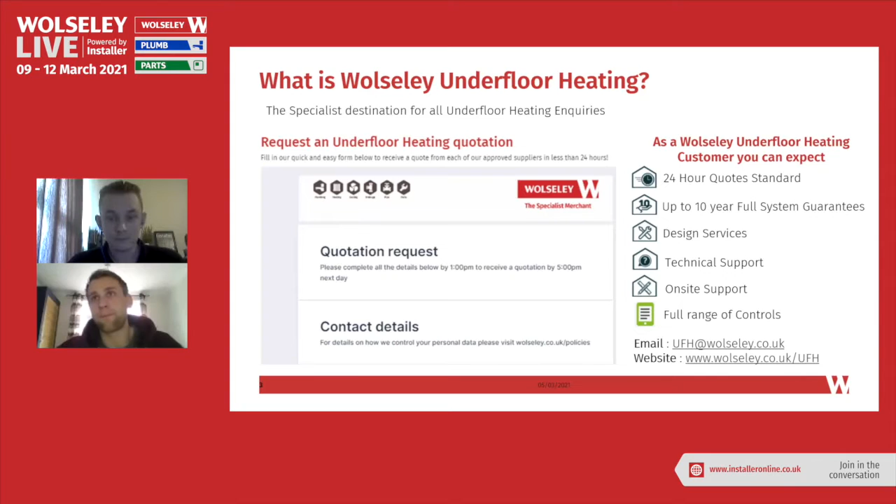Hello and welcome to Underfloor Heating Explained, part of the Wolseley Installer Live event. In today's session, we're going to talk through a brief underfloor heating market overview, reasons why you would install an underfloor heating system, how underfloor heating works, what are the key components you need to install an underfloor heating system, heating controls, suitable floor finishes, screeded floor solutions, timber floor solutions, single room packs and where to use them, and further information on the next steps for your project.

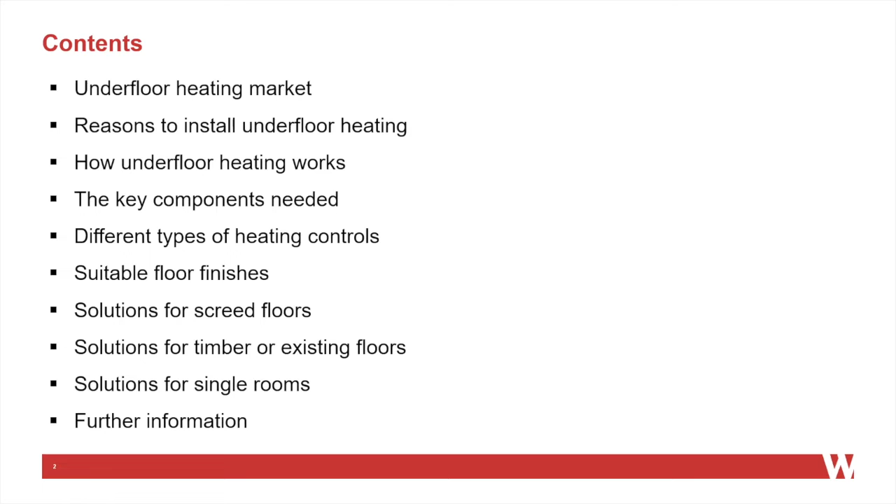The UK underfloor heating market continues to be one of the fastest growing sectors of the UK heating industry, accounting for approximately 8% share by value in 2019. The underfloor heating market has an estimated value of around 171 million, representing a steady growth of 3% compared to the previous year. This market is broadly classified into two product types: water-based underfloor heating systems and electric underfloor heating systems. With the implementation of future home standards, market prospects for underfloor heating systems in the UK remain positive.

Water-based systems are particularly compatible with low-carbon home heating solutions such as heat pumps. The performance of the UK underfloor heating market in the last 5 years has been positive, reflecting buoyant activity with some sectors of the non-residential construction industry and relative stability in the residential house building and renovation. The increasing focus on energy efficiency and the environment has supported demand for underfloor heating systems. It is estimated that water-based underfloor heating is around 25% more efficient than radiators when used with a condensing boiler, and up to 40% more efficient when running from a heat pump.

Greater uptake of heat pumps in the renewables sector is also thought to have contributed towards growth in the market, and they will have an increasingly significant role in meeting the 2050 carbon net zero target. In 2019, the domestic underfloor heating sector was worth an estimated 113 million, or around 66% of the overall market value. This includes activity by house builders, the self-build market, and refurbishment projects in residential homes. The water-based underfloor heating sector was worth an estimated 111 million, with electric underfloor heating systems accounting for around 60 million.

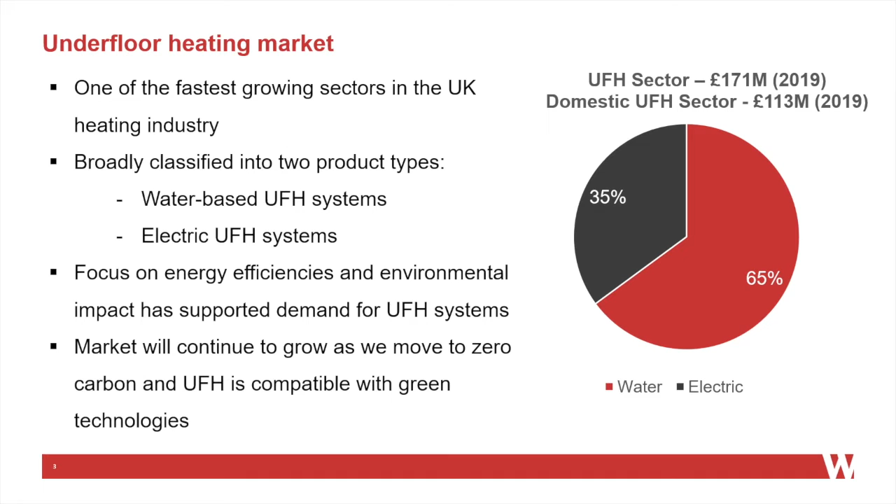Many people think of underfloor heating as a posh form of heating. In reality, it's a more human form of heating, working with the physiology of the human body. We are predators, and all of our senses, smell, taste and hearing, are on our head and cannot be covered if we are to survive. Even in extreme cold, we can have our face uncovered. Warm feet and a cool head is the way that nature designed us.

Underfloor heating, unlike radiators that work with high temperature boilers but won't work well with low temperature air source heat pumps or ground source heat pumps, underfloor heating will work well with high and low temperature heat units.

Underfloor heating systems have much more sophisticated control methodology. Using programmable thermostats in every room is the ability to turn the boiler on and off for every room in the house, unlike radiator systems that rely on one central thermostat that turns on every room in the home.

Underfloor heating is compatible with conventional and renewable heat sources that reduce environmental impact and cut fuel bills, including air and ground source heat pumps and solar panels. It's designed to work with low water temperatures and can reduce energy consumption and heating costs by up to 20%.

Underfloor heating also creates more living space. By removing bulky and unsightly radiators, it will free up wall space and give freedom for interior design. It creates a healthy living space with less moisture and lower air movement and may help reduce dust allergens. Plus, with no hot radiators and sharp edges, it creates a safer space.

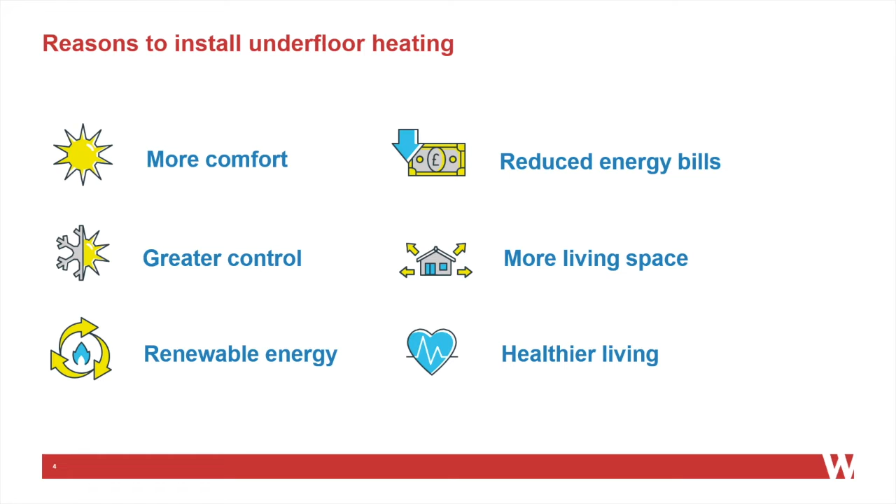Think of a bonfire. You can stand in front of a bonfire and the radiated heat will be felt on your face and body. However, your feet and back can be freezing cold. This is an extreme example of radiator heating. Underfloor heating, however, warms your feet, and radiated heat warms your body from every angle.

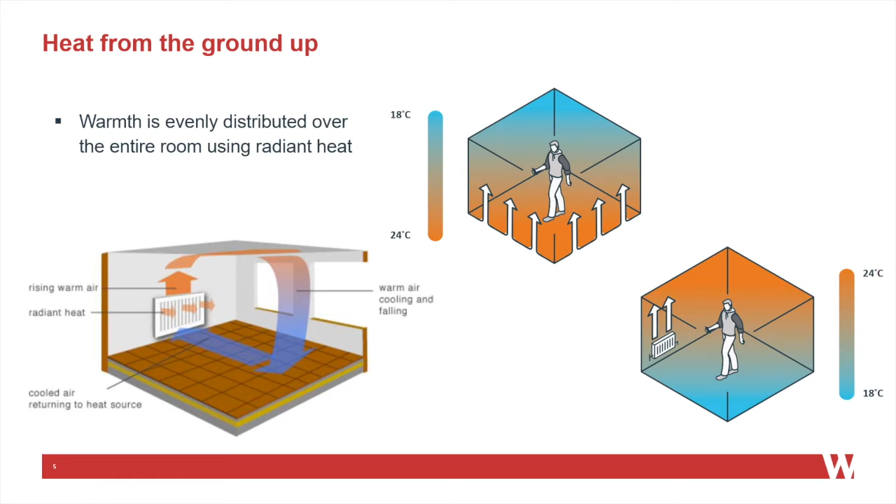How does underfloor heating work? Intelligent room thermostats activate the correct zone to heat on the manifold. The control pack pumps warm water through the circuit of pipes beneath the finished floor. Once the desired temperature is reached, the zone will switch off. If the air temperature in the room drops, the thermostat will reactivate the heating process.

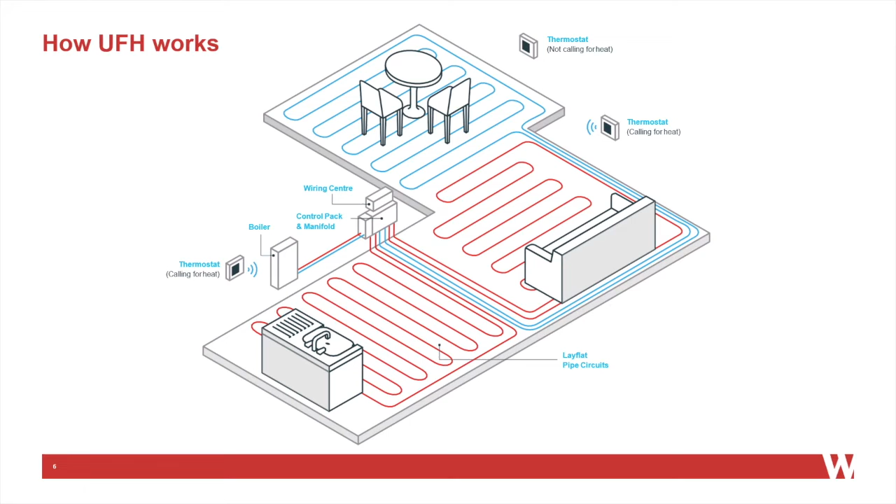Key components to an underfloor heating system. When buying a car, there is a huge choice of different types available. Each model will have benefits and drawbacks, mixing the purchase cost, power, fuel economy, gearbox type, technology and number of seats, etc. All these features need to be carefully considered to achieve the best package.

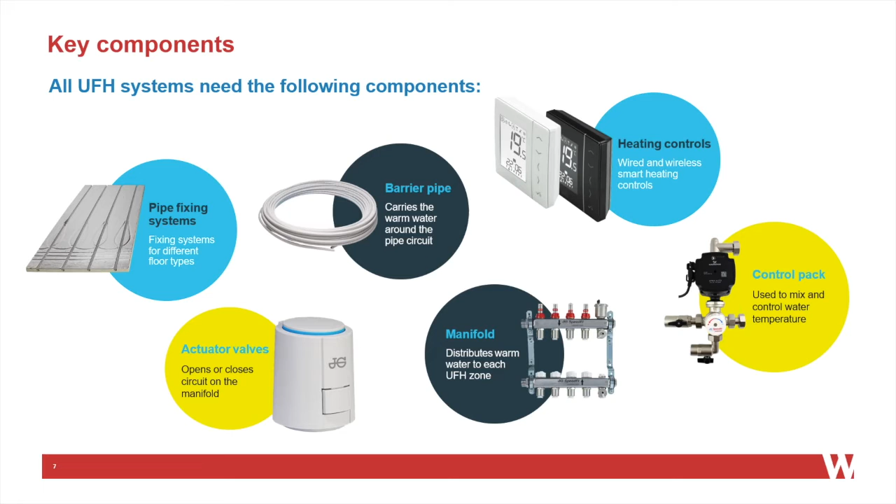Underfloor heating systems are exactly the same. Careful consideration needs to be made when combining the components needed to make an individual system. Considerations such as heat needed for the project, number of rooms to be heated, the heat source, the control type, and the floor construction. In order to achieve the correct mix, a comprehensive basket of components needs to be available to the installer.

Heating controls come in various types: simple to use dial thermostats, digital thermostats, programmable thermostats, 230 volt thermostats that we can connect to the mains, battery thermostats for simple and retrofit solutions, and internet-enabled smart thermostats. All these types have features that appeal to different customers. Some control packages also have the ability to combine the control of underfloor heating, radiators, and hot water systems in one package.

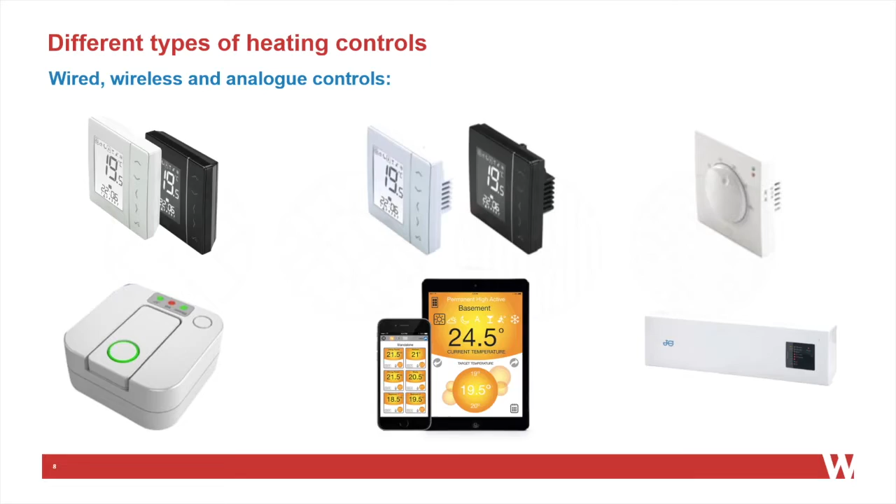Suitable floor finishes for use with underfloor heating systems. Some floor finishes offer better thermal conductivity than others, and therefore can impact system's performance. While underfloor heating can work with any type of floor covering, some such as wood and vinyl need extra consideration to prevent excess temperature. Most ceramic and stone floor finishes have a low thermal resistance. The hard surface quickly and effectively transfers heat, making it an ideal partner for underfloor heating.

Vinyl and linoleum flooring offers low resistance to heat due to its thin layer. Most types of vinyl and linoleum are suitable for use with underfloor heating, but the temperature should not exceed 26 degrees. Due to good heat transfer properties, timber floors work well with underfloor heating, especially engineered timber. Temperatures should not exceed 27 degrees and advice should be sought from your supplier.

Carpets provide the highest heat resistance. Make sure the underlay is suitable for use with underfloor heating and the combined carpet and underlay TOG value is less than 2.5. The higher the combined TOG value, the lower the heat output.

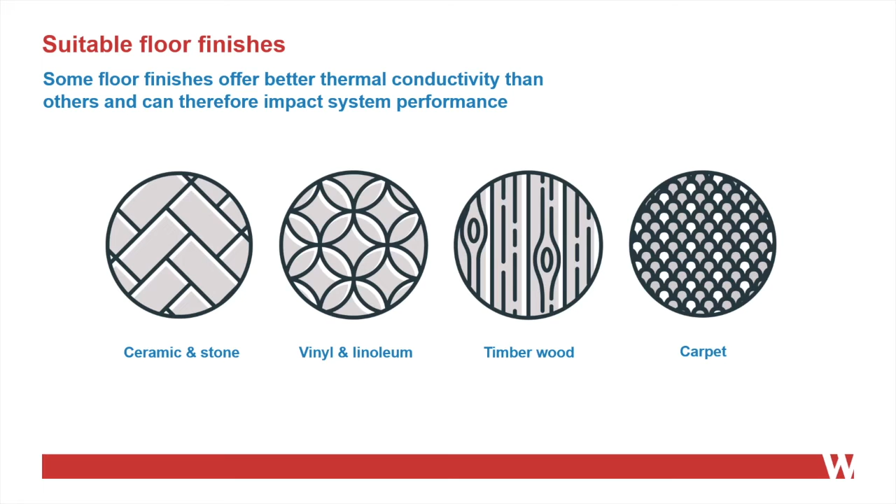Pipe fixing systems for screeded floor solutions.

In the UK, there is an overwhelming variety of construction methods. This applies to floor types as well: concrete and screed, joists and floorboards, block and beam, manufactured joists, floors under construction and existing floors. Some buildings combine different types in one construction. Many of these floor types present different challenges to the underfloor heating installer. Underfloor heating systems have to be able to jigsaw into these different floors in order to present viable solutions.

The vast majority of underfloor heating systems are installed in solid floor systems. Staple, mounting rail and castellated mats are the typical choices for this application.

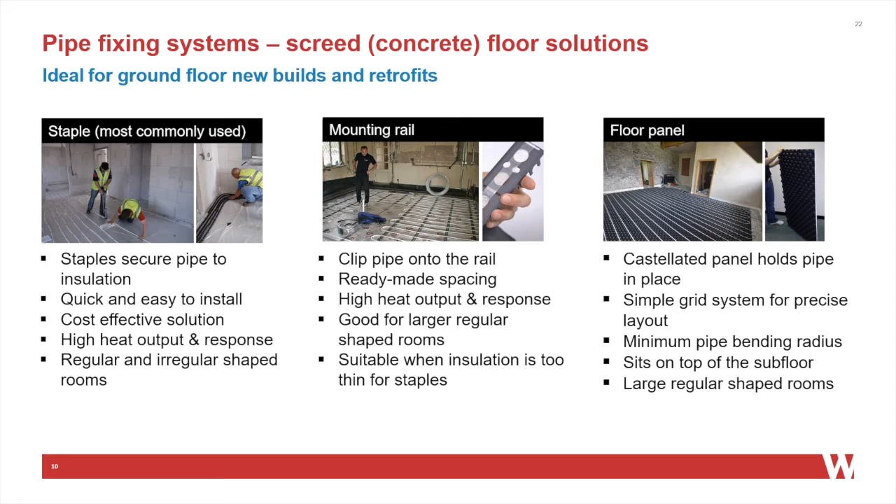Existing floor solutions. Joisted floors present different challenges. Underfloor heating can be installed either underneath the floor or above the floor. Under-floor installation is often chosen as it has no effect on the floor height, but it can be difficult in existing properties. Underfloor heating fitted above existing floors has the advantage of easier installation and in most cases higher performance.

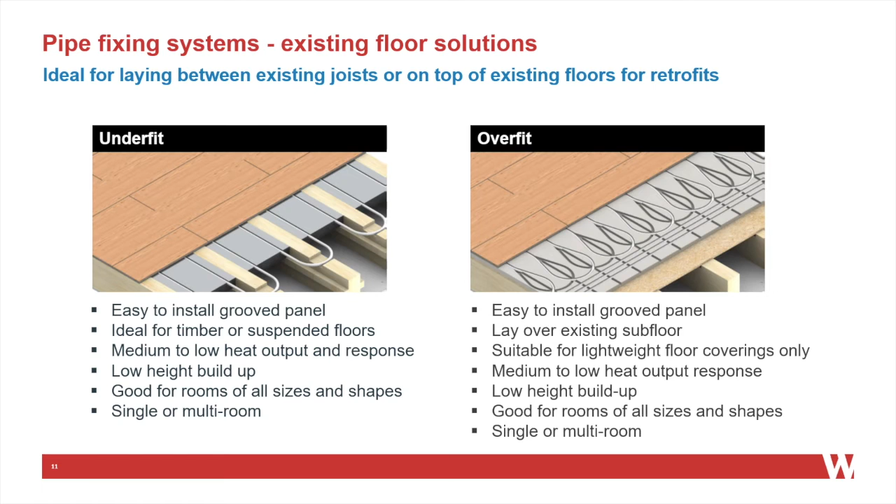Spreader plates from above are used on traditional wooden joists and sit between the top of the joist and the floor covering. Spreader plates from below are typically used for installing into an existing building where you don't want to lift the floor up, or where the building has engineered joists. Spreader plates from below sit within the joist span but don't interfere with the existing floor above.

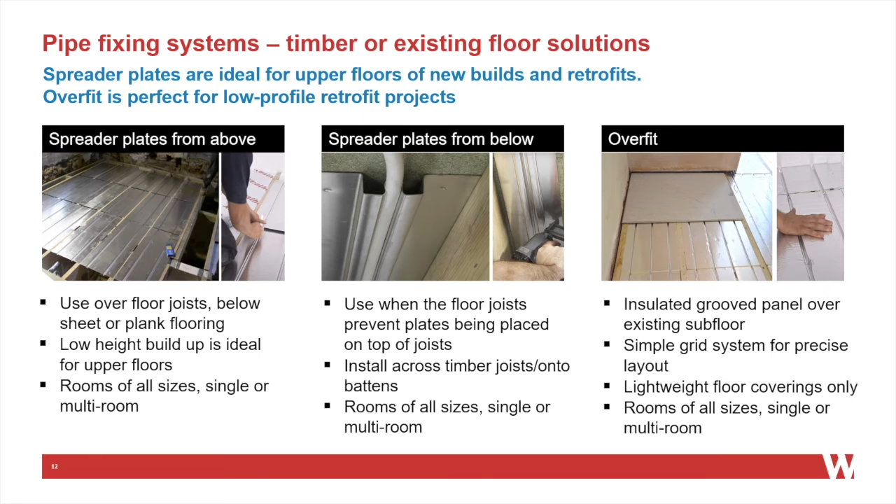Overfit is a typical solution for putting in a sandwich layer over an existing floor where it is not possible to access the floor joist or cut into the floor. Aluminium spreader plates for below-flooring and overfit boards for above-flooring solutions are the usual choice.

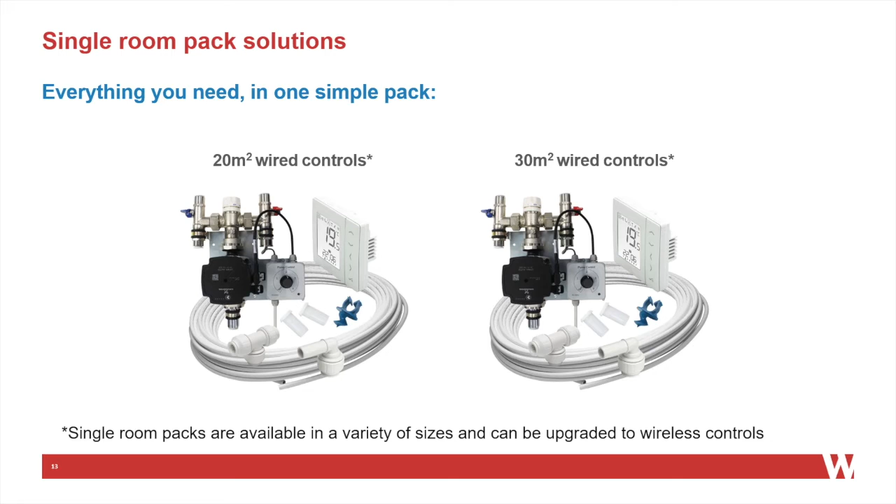Single room packs. These are suitable for single rooms including conservatories, bathrooms, kitchens and extensions up to 30 square metres. There is everything in one simple pack: simple push-to-fit connections and flexible pipe, a ready-to-plug-in pre-assembled control unit and pump, and user-friendly programmable controls, whether standalone or connecting to an existing radiator network.

Once you have decided on using one of the underfloor heating systems we have talked about today, you will see Wolseley provide a 24-hour quotation tool through their website or extensive branch network. A further range of how-to and technical data videos are available.

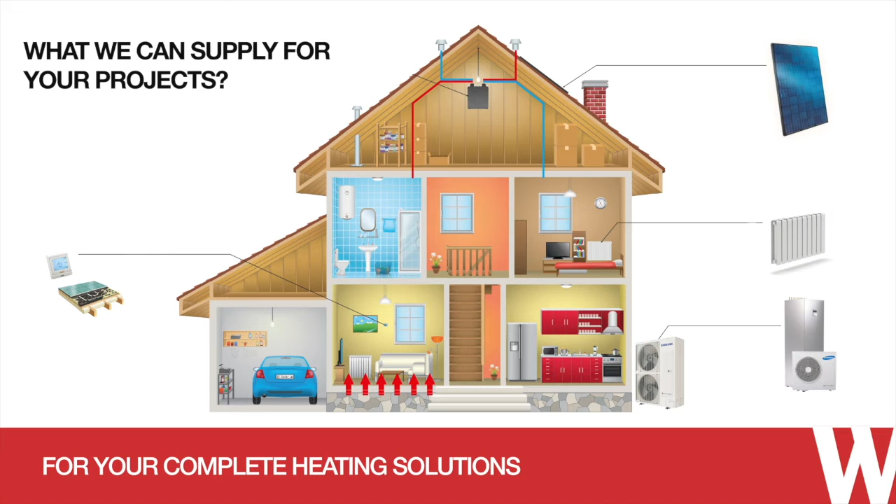Underfloor heating is ideally suited to a renewable heating system, so to accompany this we have a wide range of renewable systems available: underfloor heating, underfloor fixing methods for both ground and upper floor levels, and systems to support all project types and applications.

Air source heat pumps. In conjunction with underfloor heating, air source heat pumps are a renewable energy source that has a low carbon footprint and is cost effective. Aluminium radiators: not only aesthetically pleasing, our designer radiators have a high heat transfer and are ideal for air source heat pump applications.

Solar thermal. A solar thermal heating system generates heat by using solar radiation to heat the hot water in your property. It can work with underfloor heating and air source heat pumps, and is also cost effective.

Why choose renewables? The Future Homes Standard 2025 puts forward a notional building design which sets out areas where improvements are made. Due to the implementation of new Part L and Part F, the minimum carbon reduction required is 30%. It is proposed that the 2025 Future Homes Standard will require a 70 to 80% reduction. This can be achieved by implementing fabric improvements and/or the use of low-carbon technologies, such as heat pumps.

By fitting a heat pump now, it is ensured that the installation is Future Homes ready. Heat pumps operate more efficiently at lower flow temperatures, so underfloor heating is the perfect partner.

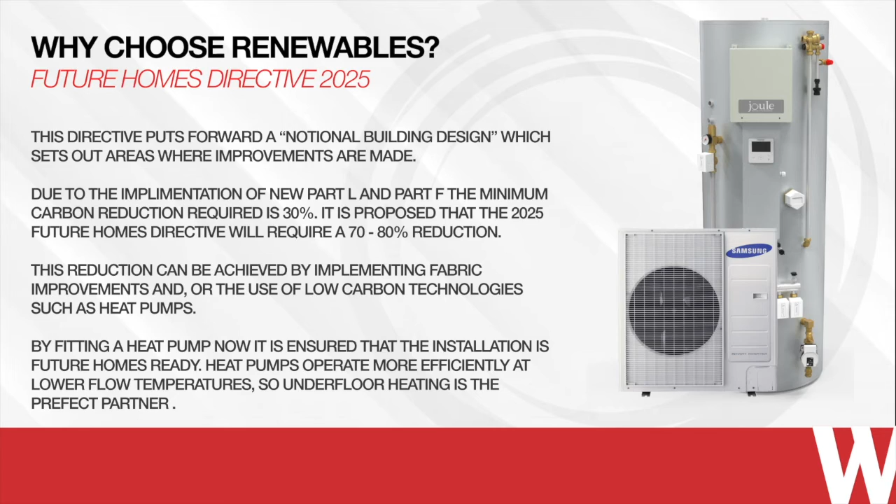How does a heat pump work? An air source heat pump is classed as a renewable heating system as it does not produce any CO2 emissions. It runs off electric, but takes its heat from the outside air and transfers this to your heating and hot water. The system produces low temperature heating, so heat emitters such as radiators and underfloor heating must be sized with this in mind.

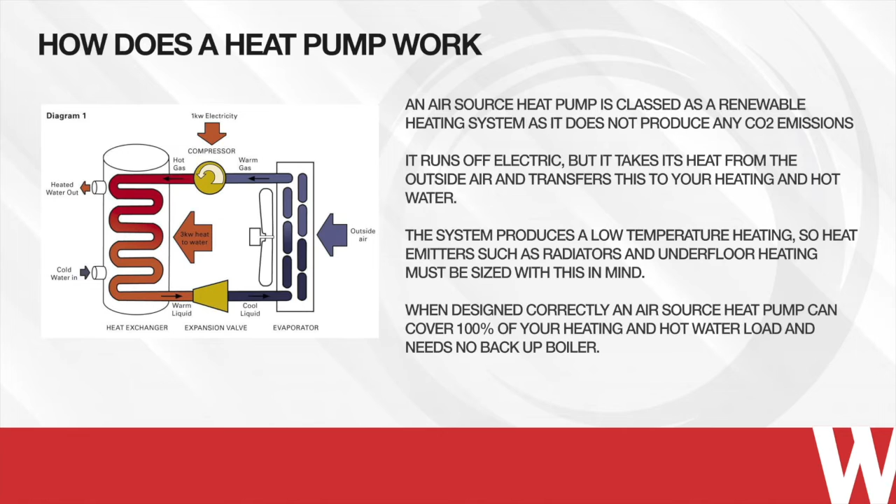When designed correctly, an air source heat pump can cover 100% of your heating and hot water load and needs no backup boiler. Why choose a heat pump? A typical air source heat pump has a COP, or coefficient of performance, of around 3.2.

This means it generates three times more heat than its energy input, making the system over 300% efficient. A seasonal COP, or SCOP, is adjusted to account for varying outdoor temperatures in different seasons. Thanks to an outstanding SCOP, heat pumps are efficient all year round and can still extract heat from the air in very cold external temperatures.

Solar thermal panels are another way of heating your hot water using renewables. These panels use solar radiation created by the sun to generate heat, which is then transferred to your hot water cylinder via an additional coil. Solar thermal panels can be integrated into boiler systems, reducing the load on the existing system, resulting in a reduction of your CO2 emissions and fuel bills. They can also be integrated with an air source heat pump system, increasing its efficiency even more.

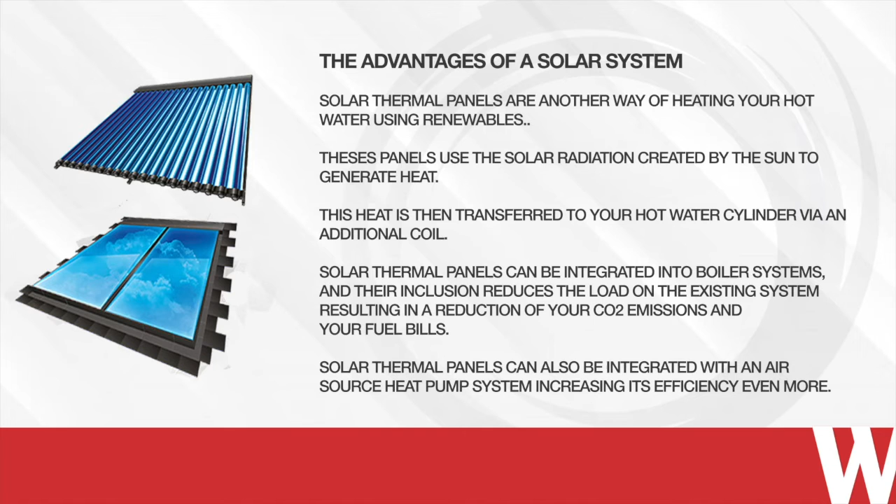The inclusion of radiators can work to boost the effectiveness of an underfloor heating design. A popular choice are aluminium radiators, which offer a stylish alternative to steel. With a high quality, modern powder-coated white finish, these radiators provide a higher heat output at lower flow temperatures and are ideal for air source heat pump systems. They come available in a range of horizontal and vertical sizes. Aluminium radiators can also be used with a renewable air source system, as aluminium radiates heat better at the lower temperatures a heat pump provides, meaning they will produce a higher heat output than standard steel radiators.

The type of hot water cylinder must be considered when choosing your system. A standard indirect cylinder has a coil suitable for a high temperature gas or oil boiler. When using a low temperature heat pump, a high gain cylinder must be used, which has a bigger coil that can better transfer the lower flow temperatures to your domestic hot water.

When using a solar thermal system, a twin coil cylinder is required. These are available in standard indirect and high gain models and have a secondary coil for the heat generated by the thermal panels. Finally, cylinders with integral buffer tanks are also available for use with renewable systems, used to increase the system volume and the efficiency.

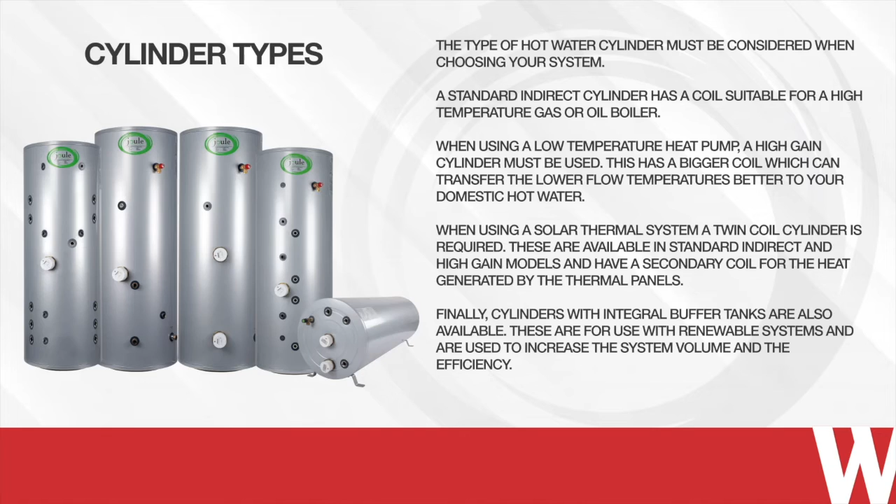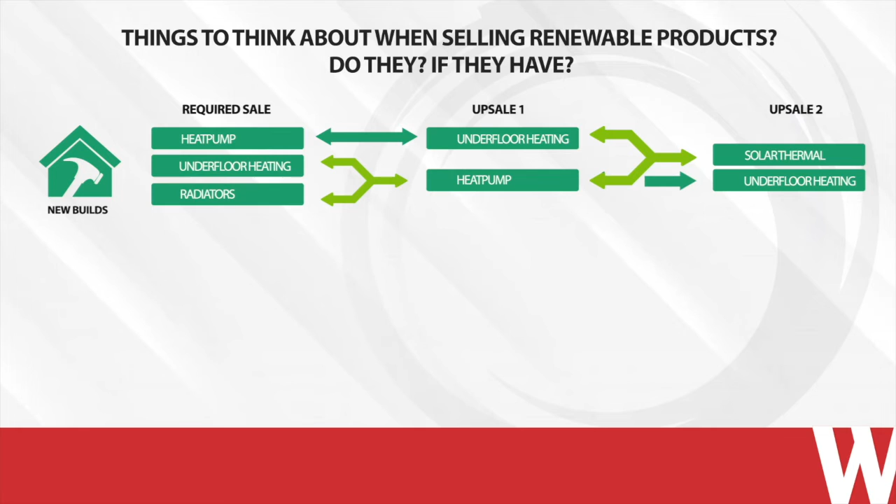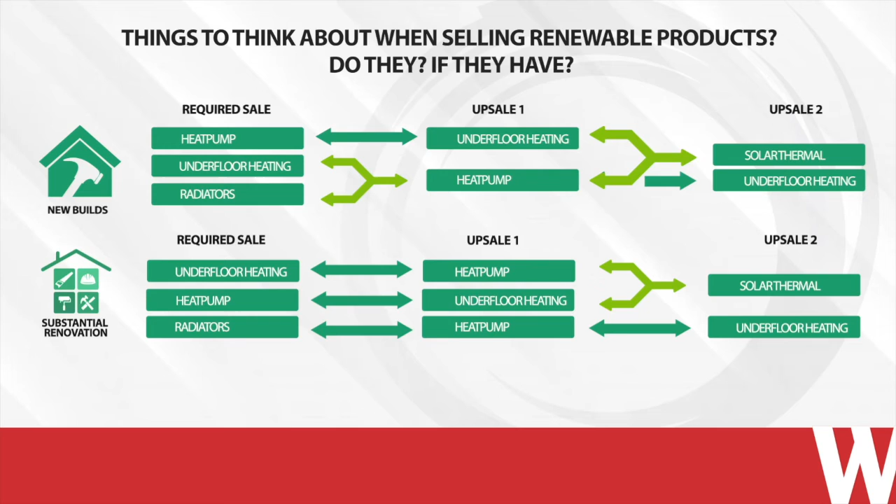Things to think about when selling renewable products: if you're being asked to quote for an air source heat pump on a new build property, does your customer also require underfloor heating, radiators or solar thermal? Wolseley can assist with this. The same applies for a renovated property - if supplying an air source heat pump, the customer may need to upgrade their underfloor heating and radiators. Again, Wolseley can assist with this. Let your local branch know if you have a project you think could benefit from renewables. Wolseley Underfloor Heating will work with our suppliers and installers to quote underfloor and renewable systems which meet the requirement of the 2025 directive. Radiators can be added to any design upon request.

Brilliant. Thanks for that, Paul.

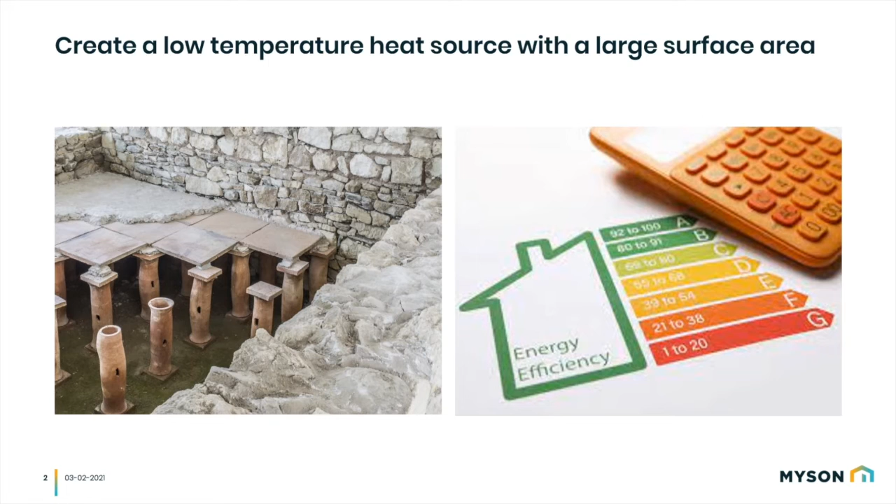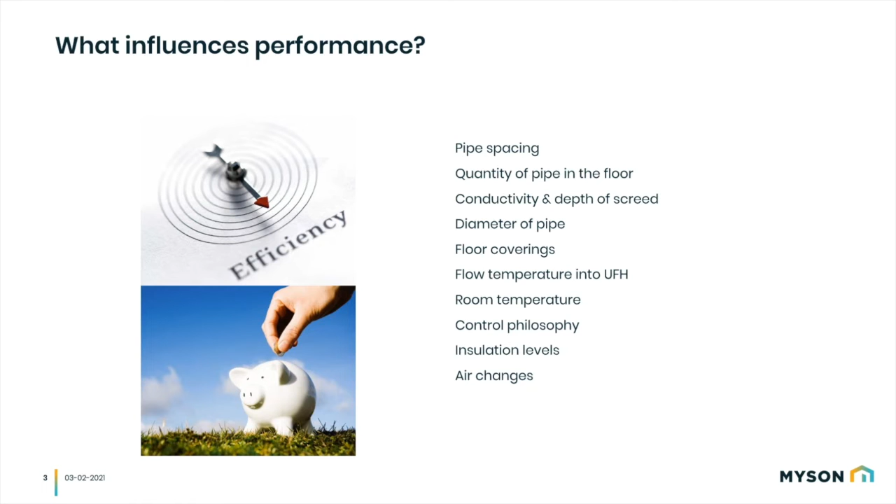In order to do that effectively and efficiently, there are a number of factors we need to consider regarding design. These things can influence the system: pipe spacings, quantity of pipe in the floor, the conductivity and depth of screed, the diameter of pipe we're using, the floor coverings, flow temperature into the system, the room temperatures we're designing to, the control philosophy, insulation levels, and air changes. Quite a lot to take in, but we're going to talk about some of these factors, consider what we look at when producing a design, look at some examples, and understand current guidelines - all in just a few minutes.

First and foremost, let's think about our heat provider, because this affects the flow temperature into the system. Using a renewable source of energy, like an air source heat pump or a ground source heat pump, may mean that we need tighter centres than, say, a traditional boiler. But we should appreciate what those temperatures are, and what the temperature drop across the system should be, what we're designing to.

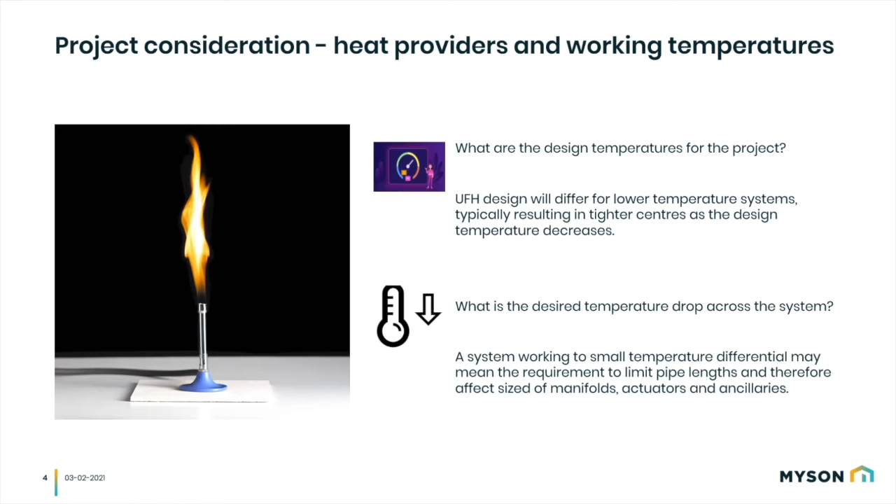A little bit of misconception when it comes to design. In the interest of clarity, we work to the relevant standards, British Standard EN 1264 parts 1 to 4. Don't panic, I'm not going to go into every single standard, but in general we'll work to the following guidelines. We're looking to heat rooms to 21 degrees C if they're occupied, 22 degrees C in bathrooms, and 18 degrees C in bedrooms.

And we're looking to achieve those temperatures at -3 outside in England and Wales, and -5 in Scotland.

Now we can't just blast as much heat into a floor as we want, because there are also maximum permissible floor temperatures that we must adhere to. Occupied living areas, that's 29 degrees C, bathrooms 33 degrees C, and peripheral areas or border circuits 35. Now some of your customers may use a floor covering that doesn't want to accept some of the higher temperatures, typically woods and vinyl, that kind of thing. In these instances, we can use sensors to limit them, usually about 27 degrees.

Now, when you look at a design, generally you'll see uniform pipe spacings, and that's been calculated to allow for the heat loss of the room. But as installers, we must use common sense at all times. It makes absolute sense to tighten the spacings across areas of very high heat loss, for example a highly glazed outside wall. We can widen them in the centre of the room because we're not losing heat there. Same quantity of pipe, but will have a positive effect on performance.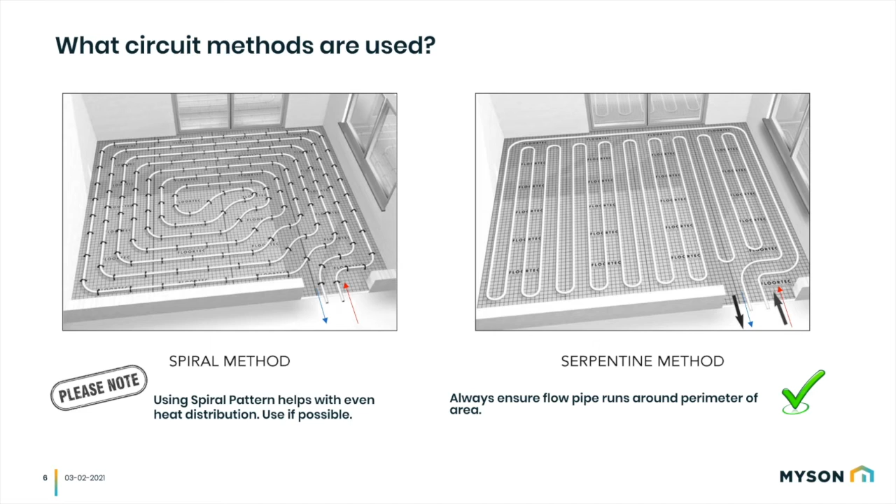Another really important factor is where we're going to put the manifold. The rules and regulations say manifolds should be sited centrally, and this is to minimise the length of interconnecting services. So please don't pop your manifold in the garage under your boiler on one side of the house, it's not really a good idea. But there may be instances where these long service lengths of pipework are unavoidable, possibly things like barn conversions or very long, L-shaped buildings. In those instances, we must insulate or route this pipework through conduit, and that reduces transmission losses.

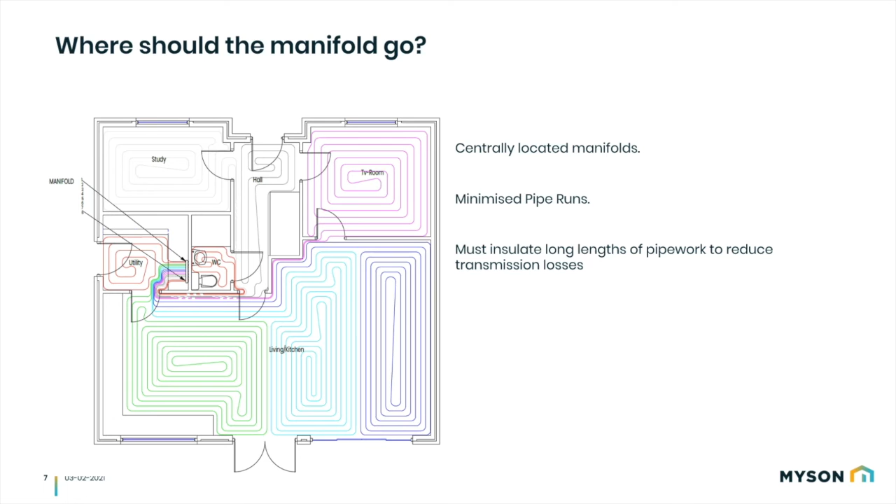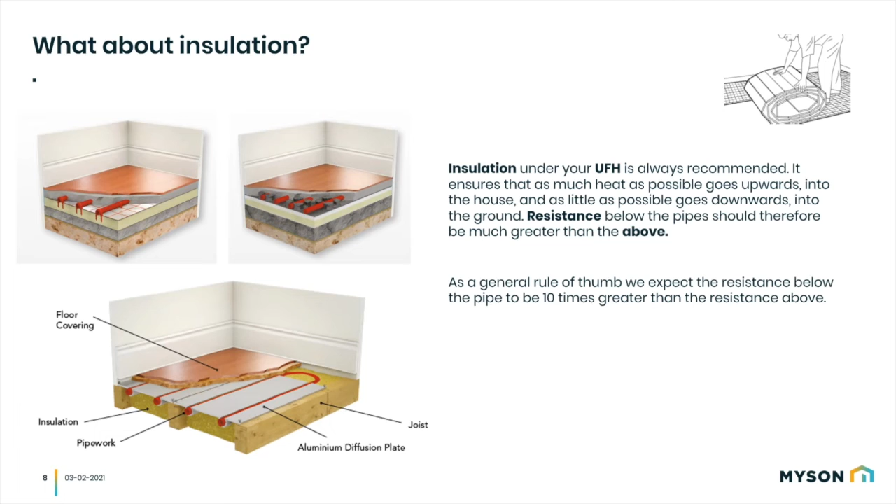And what about insulation? Well, insulation is always recommended. It ensures that as much heat as possible goes upwards into the house or building, and as little heat as possible is lost downwards. Resistance below the pipe should therefore be much greater than that above. A general rule of thumb is we would expect the resistance below the pipe to be 10 times greater than the resistance above.

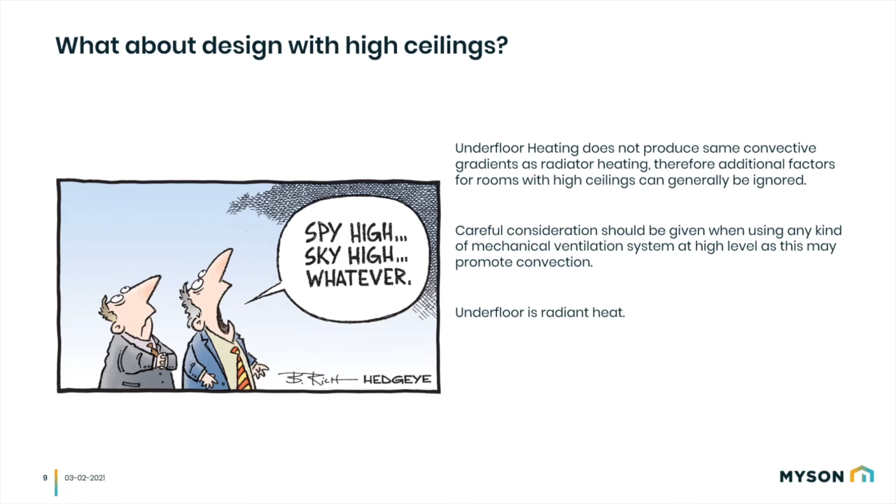What about designs with high ceilings? We get asked about this quite often, and underfloor heating doesn't produce the same convective gradients as radiator heating. Therefore, the additional factors for rooms with high ceilings can generally be ignored. A little bit of consideration should be given if you're using any kind of mechanical ventilation at a high level, because this can promote convection. Underfloor is radiant heat.

What about control? And what do the standards say?

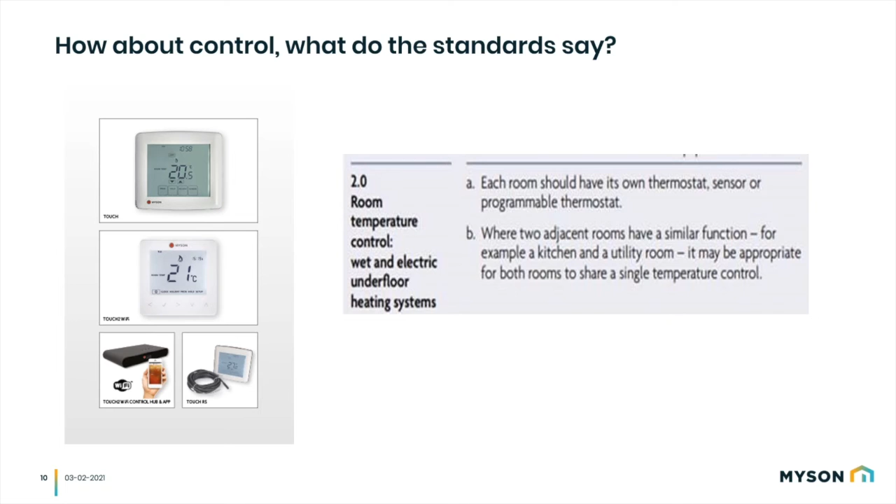Each room should have its own thermostat, sensor or programmable thermostat. This is taken from the standard, by the way. That's each room, not each zone. It does go on to say where two adjacent rooms have similar function, for example a kitchen and utility, it may be appropriate for both rooms to share a single temperature control. Well, we often see hallways and WCs being requested to have the same point of control, and whilst they may be two adjacent rooms, I don't think they have a similar function. Well, certainly not in my house.

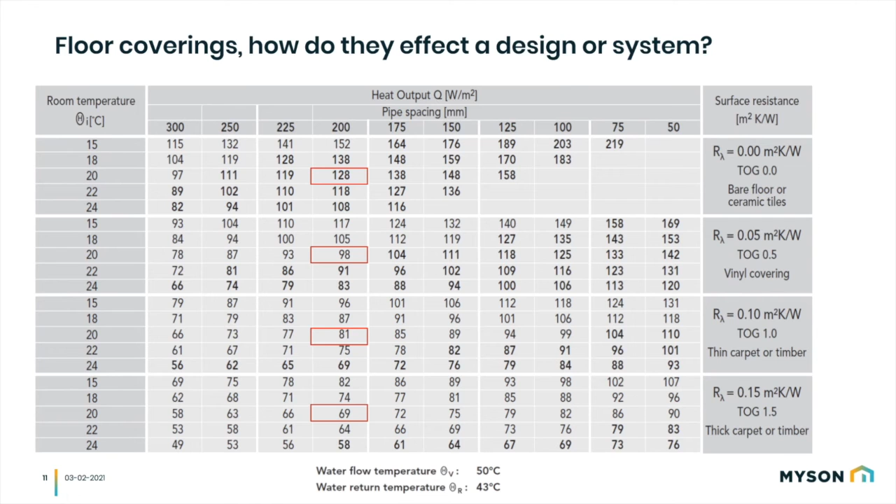So it's important we know that. A lot of the time when we come to do the design, the floor coverings haven't been decided, we might not know what they are, in which case we would normally look to design to the worst case scenario. If you think about it, how many times have you seen a nice tiled floor where somebody's then put a nice rug on it to sit a table or something along those lines?

So it's not rocket science, is it? Well, no, it's not, but it is a science. Designs should carry professional indemnity, and they should be insurance backed and guaranteed, because the outputs, the pipe lengths, the system temperatures, the flow rates, the resistance ratings — all of the above will be taken into consideration to produce an accurate and efficient design. So why take the risk? Get the design produced professionally.

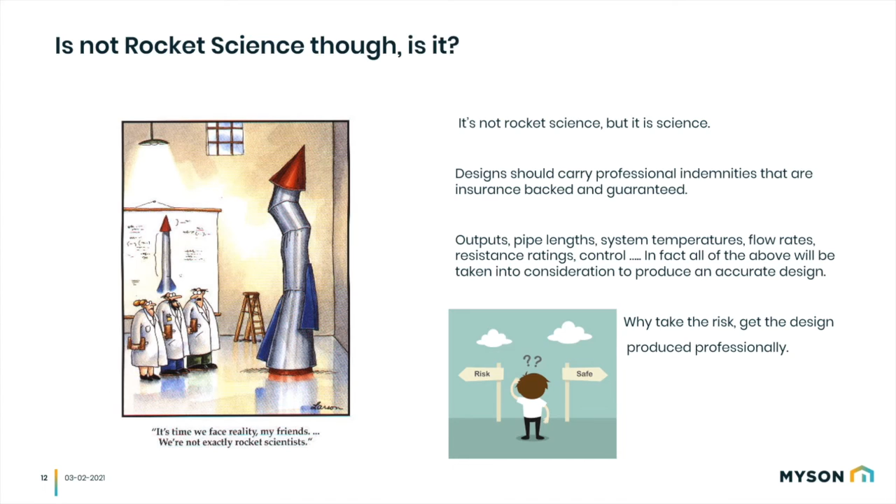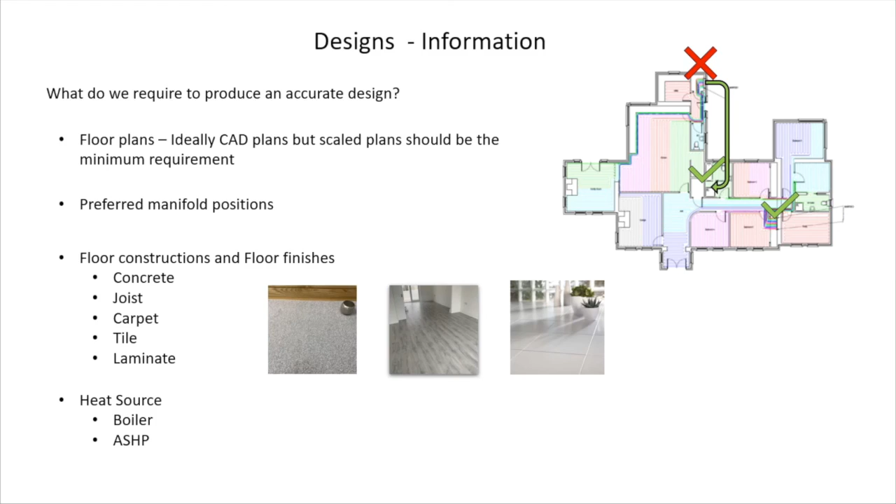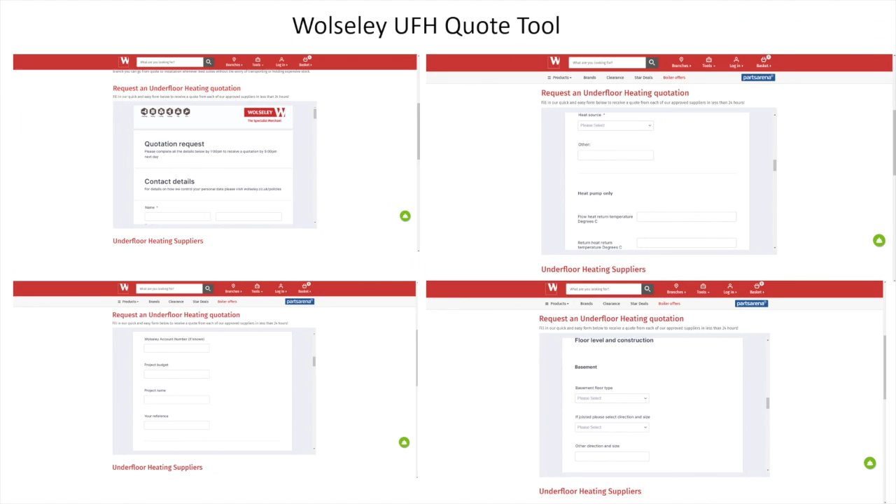That just about rounds off our session. So David, for people watching this now, how do they get more information about Wolseley Underfloor Heating? Best place to start would be to visit our website, which is www.wolseley.co.uk/UFH, or alternatively, feel free to send us an email at ufh@wolseley.co.uk, and we'll be sure to respond to you as soon as we can.